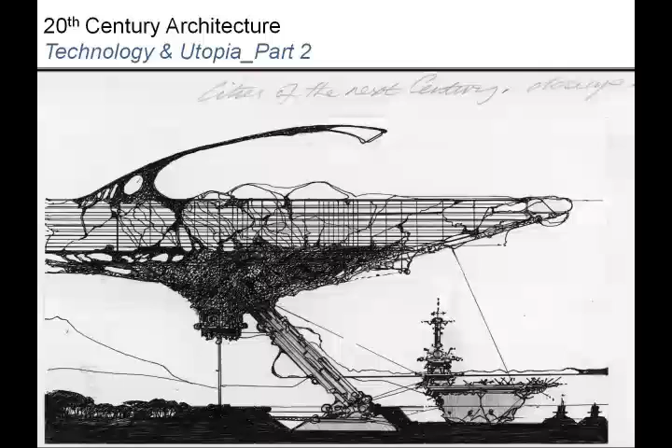Continuing now with the second part of technology and utopia, we're going to look at some other examples of where new ideas about social constructs, cities of the next century, could be realized through technological innovation. The first group we'll look at is metabolism.

The metabolist movement was started by a group of Japanese architects and city planners in 1959. It can be defined as a radical Japanese avant-garde movement, and it pursued the merging and recycling of architecture styles within an Asian context. The movement was very successful, peaking when its members received praise for the Takara Beautilion at the Osaka World Expo in 1970.

The group was dismantled shortly thereafter, though many of its practitioners received individual acclaim for their projects. The categories that the group envisioned for the future of cities around the world are large-scale, flexible, and extendable structures that facilitate an organic growth process.

One particular practitioner, a key member of the group, is Kikutake. For more than half a century, this visionary architect pursued metabolic architecture, embracing forces of renewal, recycling, and transformation. Following the debut of his Sky House and Marine City at the 1959 CIAM Conference in Otterlo in the Netherlands, Kikutake became a leading voice of metabolism.

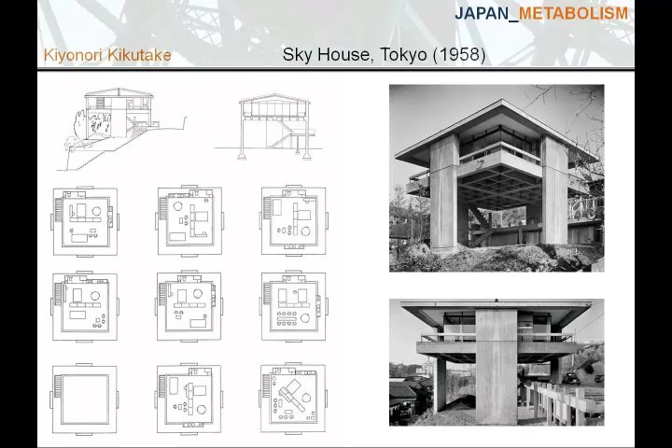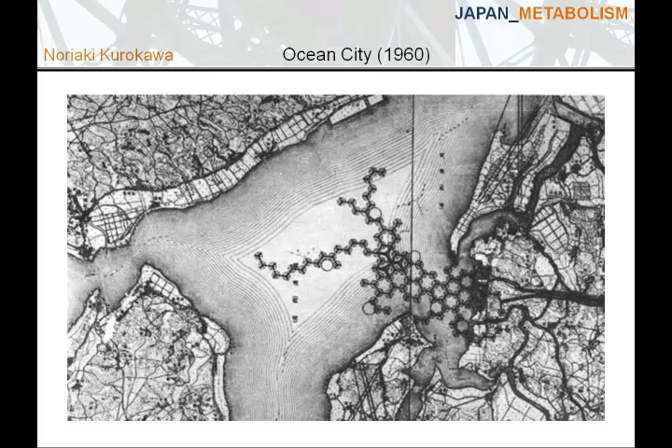Another project by Kurokawa is the Nakagin Capsule Tower in Tokyo. And here's an example of the Metabolist project that was actually built. In 1959, Kurokawa predicted a transition from the age of the machine to the age of life.

In his writing and work, Kurokawa has continually utilized such keywords as life principles. And as part of metabolism, he refers to the idea of metabolizing and recycling, ecology, sustainability, symbiosis, ambiguity, in order to call for new styles to be implemented for and by society. In his own work, Kurokawa focused on the creation of eco-friendly and sustainable architectural projects.

In this capsule tower, there is a primary structural element onto which these different apartment capsules are affixed. The goal was that these could be removed and updated or added onto, and that it had this mutability, this flexibility that would meet future needs while serving current needs.

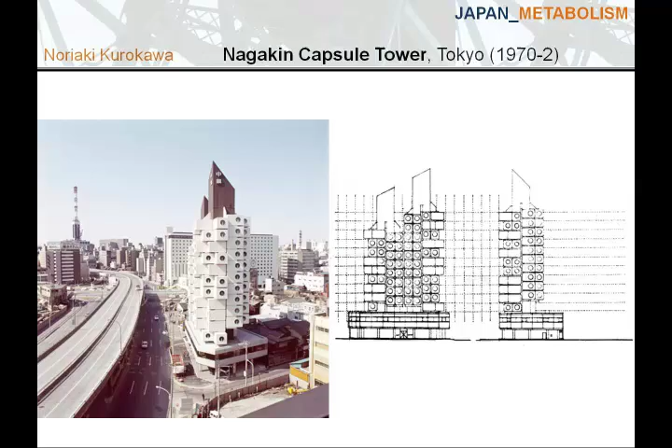A close-up of these different modules. You'll notice here in this particular cutaway graphic that the capsules were intended to be replaced every 25 years, and the core itself was designed to last 100 years.

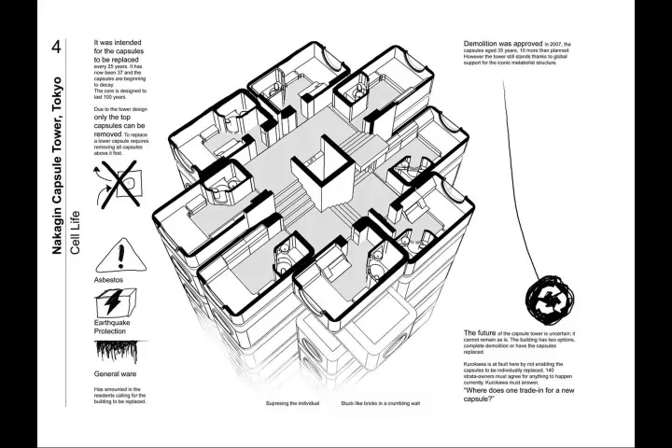Unfortunately, while the goal was to have all the capsules be removable, the tower's design ultimately meant that only the top ones could be removed. So a top-down effort was needed in order to replace all of the capsules.

So in the first part of our Technology and Utopia lecture, we looked at examples of groups like the Independent Group and Archigram, and here we've looked at the Metabolists. Now we're going to move on to some other work, projects that were built, and where the designers continued to be active in 21st century design. Let's see where they started in the 20th.

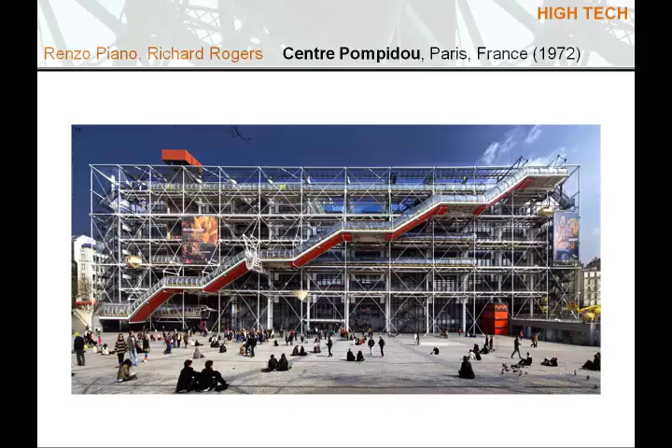Renzo Piano and Richard Rogers built the Centre Pompidou in Paris. This was meant to be a media center, multifunctional art museum, theater production, and the goal was to have the building reflect and animate its many programs.

In order to free up the floor plans inside, they created an exoskeleton. And as we've discussed before, on the exoskeleton we also have all of the services, so pipes were all on the outside. It's like having the guts of the building turned inside out.

When Piano and Rogers won the anonymous design competition for the Pompidou, no one in the jury knew who they were. But by the time they publicly presented the design, they were approaching infamy. Many people really hated this project—the French press and design public hated it. The police had to remove one woman who shouted down Piano and Rogers' ultramodern design.

By the time the building was completed in 1977, it was called, even in publications such as the New York Times, the Beaubourg Folly.

Ultimately, however, this very unusual structure ended up being vindicated. Paris fell in love with this violent break from architectural history, and, very importantly, they fell in love with the expansive cultural program that took place within this funny skeletal building. Since its completion, the Pompidou has become one of the most visited museums in Paris, and with an open courtyard in front of it, is one of the most vibrant public spaces in the city.

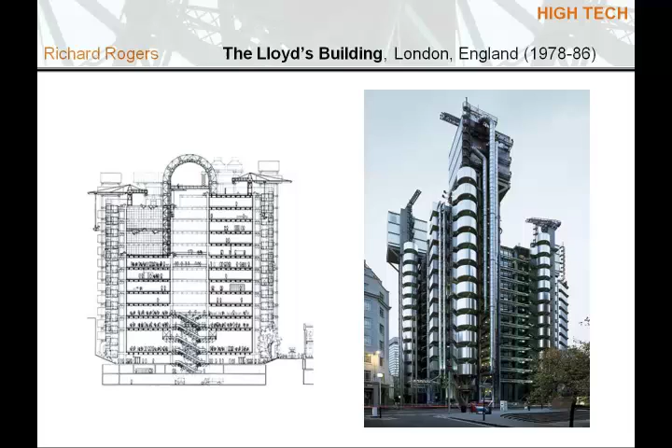Here you can see the legacy of some of the other utopian projects that we've studied: the modular approach to the exterior skin, the exoskeleton, the service piping now on the outside, and the use of newer structural technologies to make it all possible. You'll also notice, if you look at the drawing, the integrated cranes, which were part of the final design. The key to this changing juxtaposition of parts is the legibility of the role of each technological component.

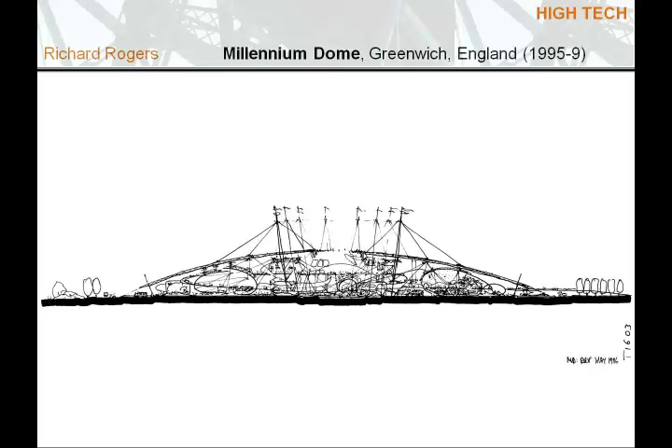Another project by Rogers, quite recent, is the Millennium Dome, designed and built between 1995 and 1999 to house the Millennium Experience exhibition. The idea was the outcome of an interaction between designers, Imagineers, and the architects, specifically Rogers. It was then taken up by the engineers at Buro Happold, who developed the concept of the tension fabric and cable roof. The structure has now become the icon for the Millennium celebrations in London.

The innovative structural concept for the roof of the Millennium Dome is quite simple in concept. Arranged radially over the surface are 72 tension steel stringer cables in pairs of 32 mm diameter steel spiral strands. The stringers are supported at radial spacing between 25 and 30 meters by an arrangement of upper hanger and lower tie-down cables, set out around the twelve 100-meter high primary steelwork masts.

Circumferential cables keep the stringers on their radial lines. A fiberglass fabric was used as cladding. The tension cables are straight and the fabric is basically flat. They both carry the loads by deflection, accompanied by an increase of tension.

This concept is simple, but there are dangers associated with the deflections, particularly that of ponding caused by snow or heavy rain.

So Rogers has gone from the Pompidou Center to a series, and we could look at many more, a series of very technologically focused projects that we refer to as high-tech architecture.

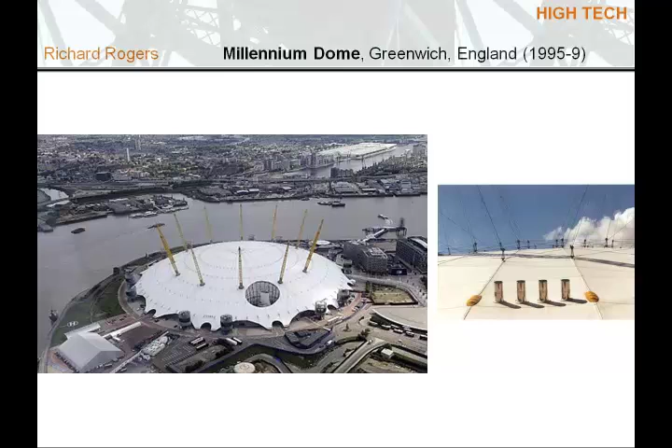Piano has moved in quite a different direction. In particular, he is known for his museum designs, and we'll look at a couple of these here. The Menil Collection in Houston was his first American project. This is quite a modest neighborhood museum, and it set a new precedent in museum architecture and propelled Piano into his current status as one of the world's most trusted designers of cultural buildings.

Piano, specifically in this building, was interested in technological humanism. And he wanted to create a transcendent space for the viewing of art that places the collection and its presentation in perfectly realized natural light. So lighting is the key driver for Piano in many of these buildings. And he wants the architecture to be supportive, so in many cases subservient to the art that is on display.

Piano refers to this project and the design details as sculpting light.

When completed, the Menil Collection was immediately hailed as a triumph. In the New York Times, Paul Goldberger called it, quote, one of the most pleasing buildings built in our time for the viewing of art, unquote.

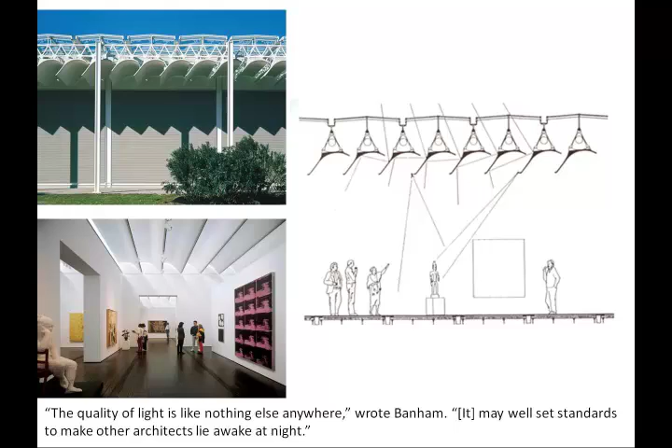300 such thin, curving sheets offer a sculptural, idiosyncratic sense of handicraftness to the otherwise spare and minimalist white-walled museum. Their presence and visibility from the gallery interiors make their channeling of light a more intimate experience. As Piano said at his Pritzker Architecture Prize acceptance speech, quote, light is as much a part of the composition as the shapes and volumes of the building, unquote.

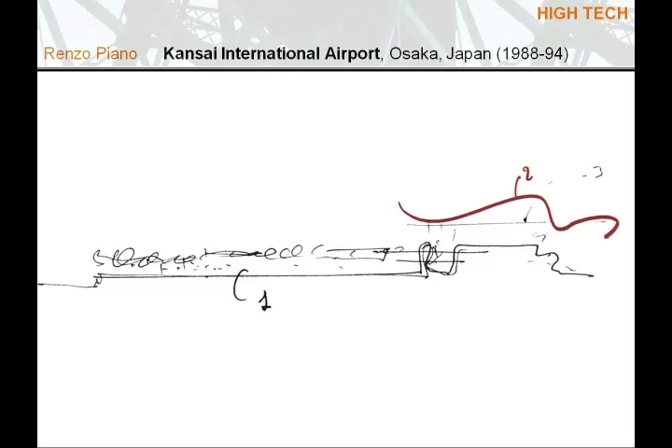Look quickly at a couple of Piano's other buildings. This is the Kansai Airport. It's located on a specially built island in the Bay of Osaka in Japan. The terminal is 1.7 kilometers long, has 42 boarding gates, and can handle approximately 100,000 passengers a day. Its long and light structure was designed to withstand the violent earthquakes that often affect this particular area of Japan. So this is really seismic design at its finest and most elegant.

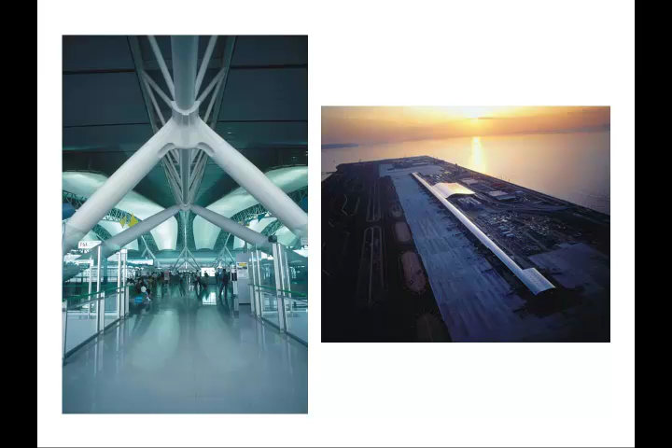Piano also designed a new headquarters for the New York Times, through an invited competition in 2000. This particular project really opens up a neglected corner of Manhattan opposite the Port Authority. And the building ends up being a 52-story structure. The key themes for the architectural parti were those of permeability and transparency. And what the Piano Building Workshop's goal was here was to express the intrinsic link between the newspaper and the city.

So far in this high-tech section, we focused on the work of Renzo Piano and Richard Rogers, emerging out of their shared Pompidou design. But there are other well-known architects also working in this medium. One of those is Norman Foster. And here we see the Renault Distribution Center in Swindon in the United Kingdom. What you'll notice is that this is a suspended roof structure.

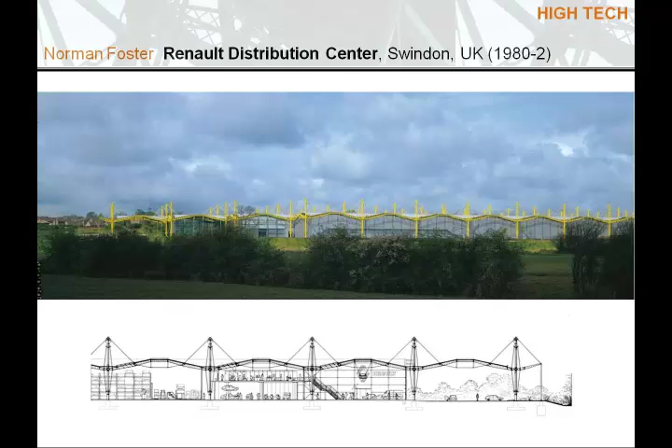In the section, you get a sense of the stays and the cables and how this structure comes together. The benefit of this kind of design is that it opens up space underneath. It's usable for exhibitions, displays, local events, as well as anything that Renault might need to do in terms of its distribution.

The lightness of the structure, the fact that it can be extended in theory infinitely, all of this speaks to some of the ideas that we saw with Archigram and the Metabolists. Yet here we see it realized in a very high-tech manner using the latest in structural technologies.

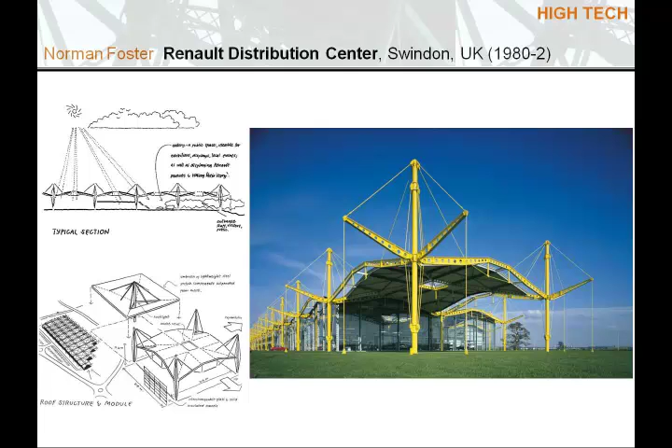Norman Foster is also well known for his Hong Kong and Shanghai Bank, which at one time was the most expensive building in the world. You could see on the exterior of the skyscraper the lateral cross bracing, and on the interior this very high atrium allowing light to pour into the building from the sides and the top of the structure.

Foster has become known for his skyscraper design and for their original and image-focused facades. This is the Swiss Re Tower in London. And a detail of this, you can see the diamond cross bracing, the structural element that covers the entire facade.

Recently I visited the British Museum in London and was struck by the great court roof that was built. Prior to this Norman Foster design, the court was open, but now it has been covered by this very delicate, very successful roof, glass and steel, very light, that does not take away from the existing architecture, yet manages to create an open sculptural courtyard that is now protected from the elements. And here we have a bird's eye view of that and of the London skyline around the British Museum.

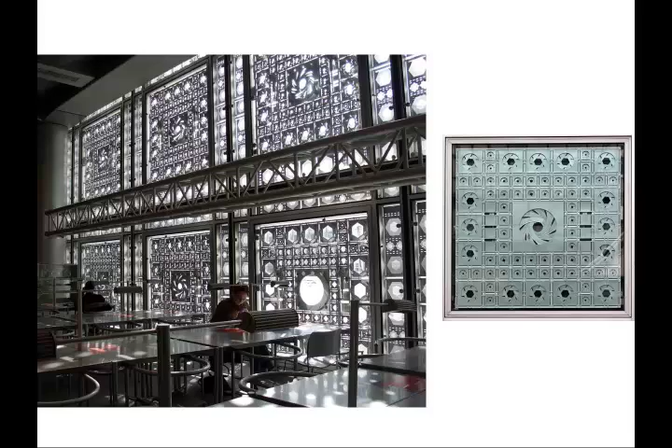It's very technologically focused in terms of its material and aesthetic. But the idea behind it is each one of these different panels would actually work like an oculus, so that as the intensity of the sun increased on the facade, the lens would close, allowing less solar radiation, less light to enter into the interior of the library. So as you're in the space, you can hear the little machines as they move and open and close, allowing more or less light into the primary reading room.

Greg Lynn's embryological house, 1998-9, is a really wonderful, groundbreaking early work of digitally created theoretical architecture. The dynamic forms of the house comprise flowing and vector-based surfaces, sometimes referred to as blob architecture, made possible through animation software. So the 1990s and on, and certainly into the 21st century, software and computer-aided design tools have really radically altered the field and discipline of architecture.

In this example, Lynn rethinks the notion of the manufactured house, moving from the modernist idea of a form based on modules to a form based on potentially unlimited iterations derived from a basic form, or what he refers to as a primitive form. His goal is to design and manufacture houses that exhibit variety based on shared regulating principles, a, quote, mass customization, unquote.

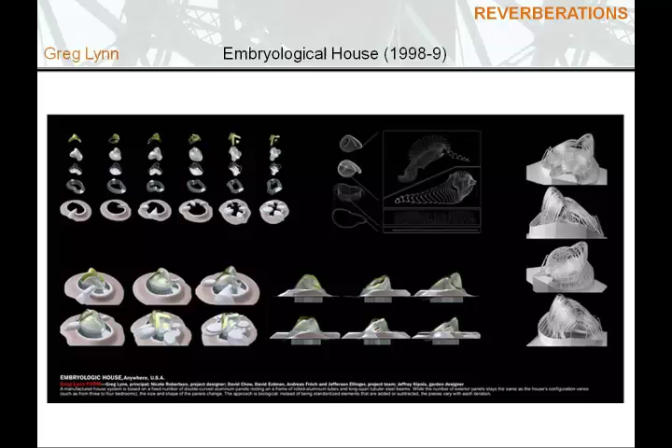The materiality of his models formed an important part of the creative process. For example, Lynn deliberately exposed the means of manufacture by allowing the computer-controlled tools to leave their marks on the model's surfaces.

Lynn set a number of goals for this conceptual work. He wanted to rethink the idea of house typology beyond the modernist kit of parts. He wanted to consider an organic, flexible, genetic, generic prototype from which an infinite number of iterations could be generated. He also wanted to extend the interplay of generic and variation implied in this rethinking to notions of product branding and the satisfaction of individual desire through consumer-specific, unique versions of the product. And finally, he wanted to push the capabilities of existing automated manufacturing technologies for the production of non-standard architectural forms.

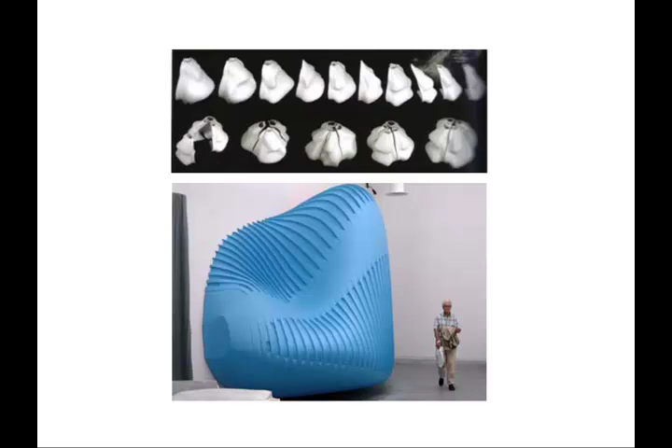The use of multiple software applications to develop the work's forms is inherent to Lynn's creative process. So coming out of these ideas, computer-aided design, blob, sort of plastic, metamorphosizing structures, we're going to quickly flip through a few examples of projects built right at the end of the 20th century that speak to the application of computer-aided design and modeling softwares in their creation.

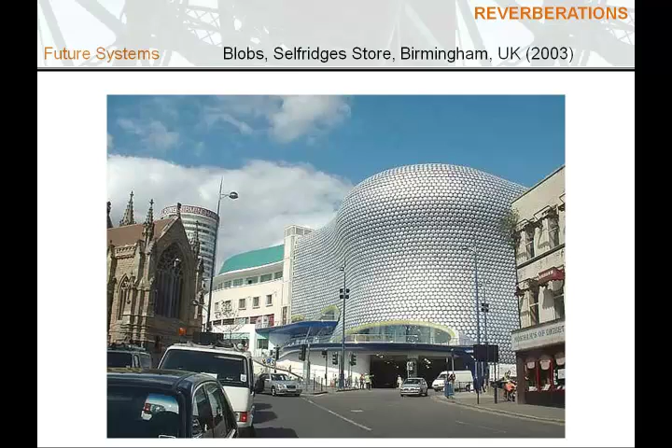Future Systems designed what is referred to as Blobs, which is the Selfridges store in Birmingham in the UK. The skin of this particular building, we'll zoom in here a bit, you can see there's the inside of the store. It's made of a repeating pattern that coats the skin, not unlike a skin, say, of the scales of a reptile, for example.

And so on that note, let's end. The 20th century starts with a reconsideration of what the future means and what it means to be modern, and ends with the promises of new technology through computer-aided design. And in between, there are two world wars and countless other influences that tested and pushed the boundaries of what architecture could do and should do.